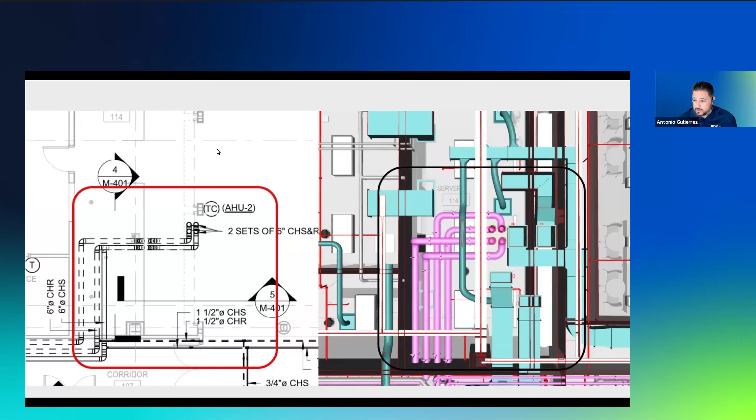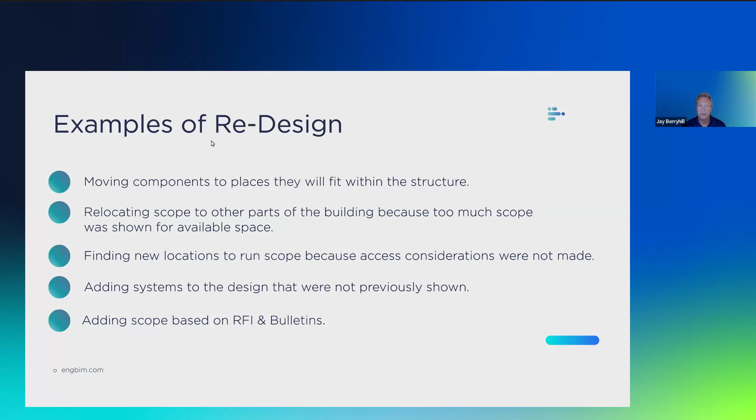Hey, Antonio, real quick, what tips can you give anyone in the trade on how to foresee some of these issues? One of the big things I do at the beginning of a project is I overlay a few of the trades, so I can pinpoint some trouble spots, narrow my focus, and then dig a little deeper. If you take that at the beginning of the project and just glance at a few things, overlay in a PDF viewer, it might help you focus.

Jay, yeah, jump back if you can, jump back some slides. Yeah, so let me come back. Sorry, guys. Kind of go through some stuff that we think doesn't really fall into coordination. That's really more redesign. Got it. Yeah. Okay.

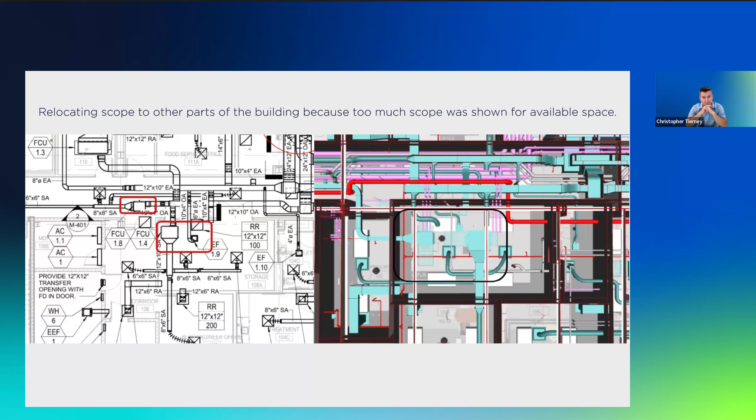And to try to point this out, this is a project that Antonio and I worked on together. I mean, these moves aren't by choice, they're by necessity. And I think that's a good point to make. You know, as a contractor, we move things out of choice sometimes to make it better for us or make it more reasonable. A lot of times you're forced into moving things out of necessity because where they're at doesn't work, or once you start to develop it, you find that it just can't be there. So this is a good example of something that moved out of necessity versus something that moved out of choice. Got it. All right.

Okay, this one, an FCU as well. This one's fairly big, so it was located in the far right corner in that smaller room. And as you can see, there's way too much congestion in that room for it to fit. So they had to drop the pipe to go below the steel. So again, total relocation. You know, look at the size, look at the access zones, things like that. It has to fit within the purpose of the structure.

And coordination versus redesign, it's also something to consider. I mean, we talk MEP, full circle, moving a component from mechanicals may impact electrical and plumbing and everybody else. It's not just the activity, what you're going to do to move or redesign your stuff. It's also the chain reaction that occurs when you start moving things, what it does for everybody else, which needs to be considered in that overall concept. Got it. Okay, next one for me.

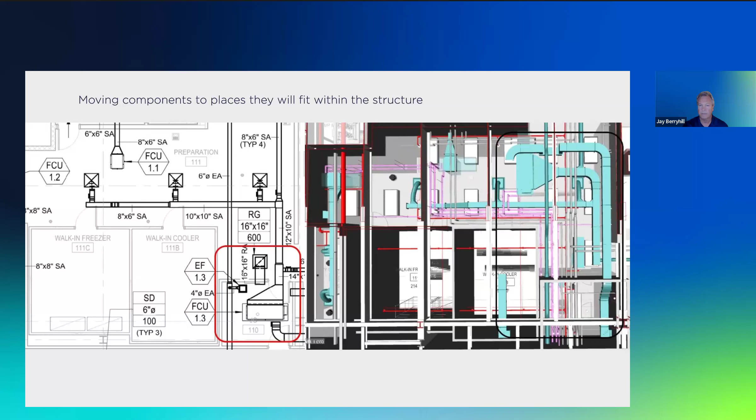Okay, another FC unit as well. It shifted out of the corridor. So if you look at the access zone, you wouldn't be able to access this unit in that corridor. So it had to totally shift again to the right because of the access. So new location.

And some of those things come into it. We go back to the contract documents and say, what do you own? And on a job like this, they'll tell you, you own constructible documents per the code. Well, codes may require electrical clearances, things like that, that aren't considered in the design. Now, is that a coordination item or is that a design item? And this is a good example of an electrical code issue that you couldn't have achieved based on where they showed the unit.

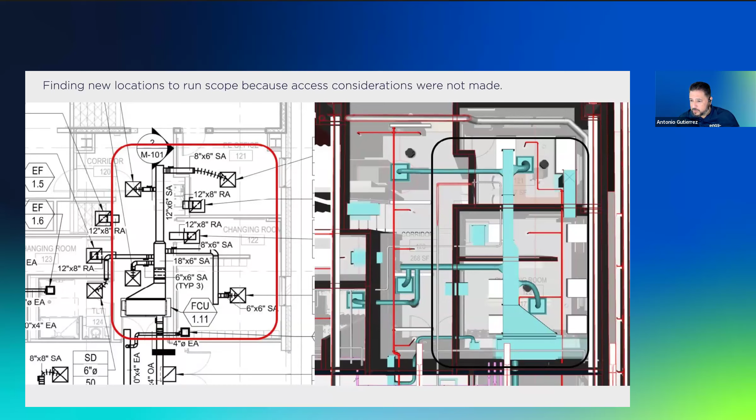Yeah, and because this one shifted, they had to up the size of the duct to catch those two taps on the left. So it's not just the movement of the unit, it changes more than that. So okay, next one for me, Jay. With this one, it's important that RFIs are accurate. So if you look at the left one, it's just the design RFI, and the right one's the accurate one. So next slide for me, Jay.

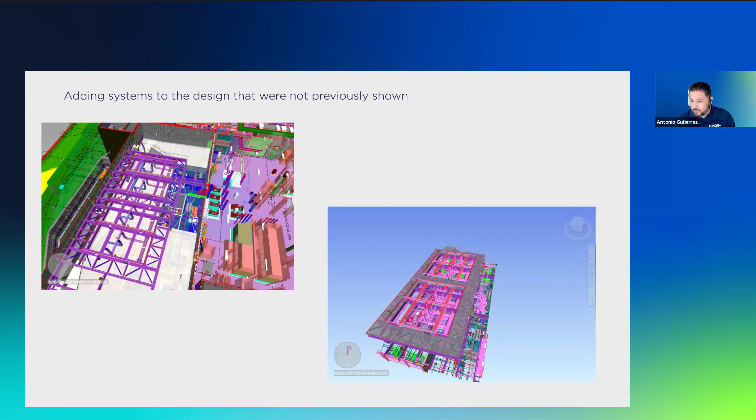If you look at this one, next slide. Okay, the left one is the design. So in the design, we only have supply, return, and the exchanger underneath with all that steel. If you look at the right, we had to add two other trades. We had to add drain and we had to add makeup water. So new trades, added scope. Again, it's going to add fittings. It's going to add penetrations. It's just going to add a bunch of stuff. Those are all things we need to look at.

Okay, next one for me, Jay. Again, this one, same thing. Accurate RFIs. We need to take the time to look at those things. This is your heat exchangers, different sizes, different depths, pad size changes, rotation, pumps moved, all because of the accurate RFIs. And with this, I'll pass back over to Chris.

Hey, Antonio, a quick question that came in. Some changes are just in coordination. Others require discussions, approval. How do you know which is which? For me, I set little rules for myself. If it shifts from one room to another in ductwork, that's a design change for me. But also when you're dealing with equipment, you're thinking of size, weight, pad size. If it's affecting any of that, we really need to look at that and say, hey, it's a discussion. If we have to talk about it more than once, obviously there's an issue. Yeah. So.

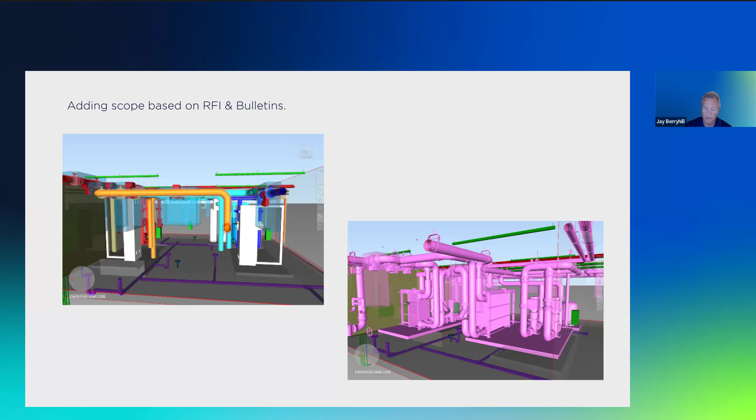So we identify there's obviously a question, problem, concern, something that comes up on a lot of different projects. So again, it's easy to identify the issue. So let's just talk about solutions. And the goal or the hope is to always minimize problems, minimize issues, minimize anything, because nobody wants to solve them after they're problems. So some of what we want to talk about is some concepts you can do to try to mitigate some of them or kind of head them off at the pass.

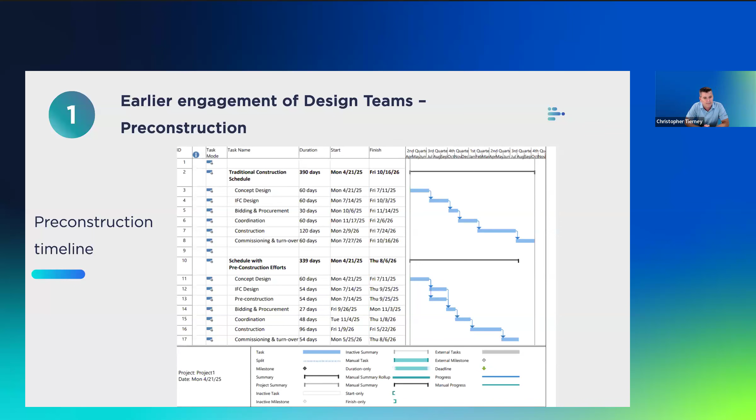Second concept. Utilizing real data and components. So we all know we bid jobs, we get jobs. We don't always know what we're going to use. We haven't gone through the purchasing process. We haven't gone through the submittal process. Maybe we haven't figured everything out. So we believe that the earlier you can incorporate real components into the design, the better off you'll be. Because again, not knowing what you're building to and putting a box in there isn't really going to make a lot of sense. And we go back to trying to avoid having to redo things, because that's redesign in my mind.

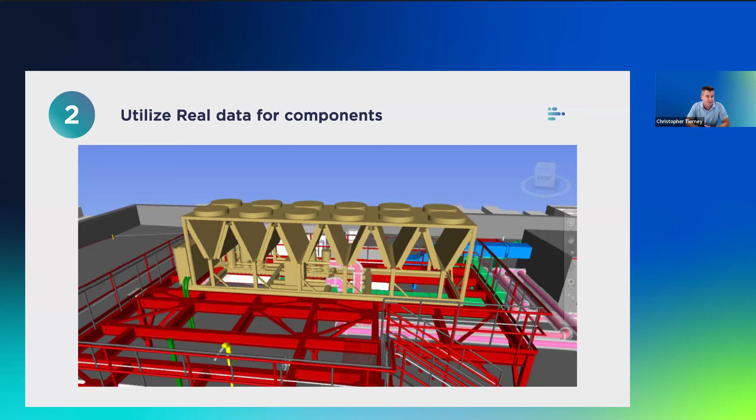Right. Next concept, Jay. All right, so determine design parameters and logistical issues in the initial design. So what do we mean by that? So understand what you're going to be governed by, understand what you're going to be held to. So code requirements for a project. What are the code requirements? ASME, ANSI, local jurisdiction code requirements, electrical codes. Understand the code version, what the specific requirements are in those codes. So know that going into the project so you can build that into the design.

Project specific specifications. We've all bid jobs. We all get these package specs that are 2,000 pages long and it's got everything under the sun. We really try to drive to project specific specifications. And with that, we really are talking about trying to get into specs that are really designed for that job and for that job only.

Jay's jumping ahead on me. He's going to check to see how well I know my slides. Sorry about that. So just, we'll see if you can roll back one more for me, Jay. I don't have them all memorized, but, well, hang on, let me see. Are we caught up? Have we caught up there?

Here we go. Okay. Safety considerations, a big item. We often talk about it too late in the process after coordination's been done. It's usually a function of the construction people telling you what they need for safety or the owner telling you what he needs for his long-term safety. So we want to think about those things early in the design process, make sure they're built in.

Owner requests for clearances or access. The owner's going to live with this building for however long they are. Their request should be considered whenever possible. Sometimes we think we have enough space to do something. The owner may need more space, may want more space, or he may have a long-term plan for the facility that we don't know about, fork trucks or equipment or whatever it ends up being. So you want to figure that stuff out in the initial design so that you don't have to worry about trying to add it in after the fact.

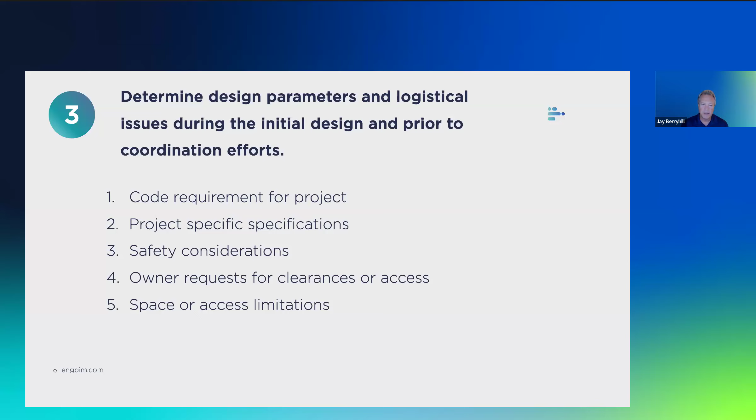And then lastly, space or access limitations. This is a big item that we often don't see in the initial design process that we want to get incorporated there, because more often than not, those things don't come up till the end or after the design's done, and they create a lot of havoc. And Jay's going to jump to the next slide. Chris, can you give an example of that? Yep. Next slide, I'll give you a good example. And it's a real life project we had.

So when we plugged them in, we found that basically everything we had done for these units wouldn't work. And we then had to go back into a redesign process based on access requirements that, had we known them early in the job, we might have either changed the equipment, changed the location, identified the concern to the engineer. And should he have known this stuff early in the equipment selection? Probably, but you want to pull that stuff out before you do the drafting, not after you do the drafting.

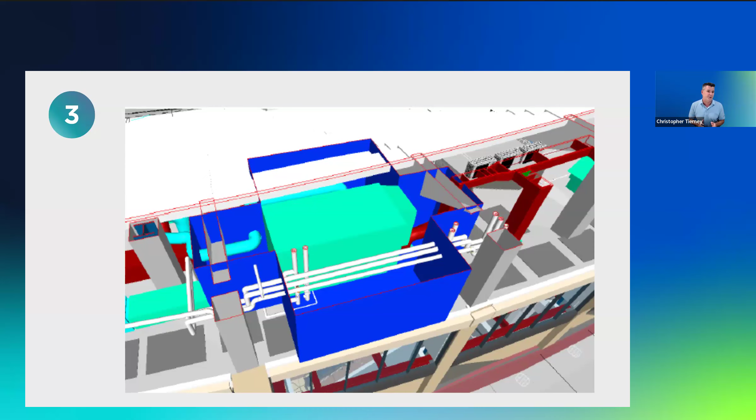Next concept. Engage installers for access requirements and constructability. So I'm a contractor. We have a lot of installers. Those installers have a lot of opinions and knowledge and insight that maybe somebody in an office doesn't always have. So we often try to bring them in or get them involved in some of this stuff.

So things that we talk about: clearance requirements for rigging and installation. If I can't physically get that component where it needs to go, it doesn't matter that it fits in this space. It doesn't matter that it's the right piece. If you can't get it in there, it doesn't solve a problem. You got to work that stuff out usually in the construction process and or move it. So that's a big item. Piece size limitations. We see this come up a lot. Again, renovations, existing facilities.

What can you physically get in the space? Know what those piece size limitations are and know that you've selected stuff that works, because again, sometimes you can choose an alternate manufacturer or an alternate piece that may be smaller, maybe breaks down. You want to know that stuff going into the design process, not try to figure it out after you're done, figure out how to make it work.

Egress paths, overhead clearance, another big item. You may not see that in the coordination effort, but you may find out in the construction process that it needs an egress path, it needs head clearances. Those are items that you often find late in the process that cause you to go back into the design. Again, going back into what we talk about as redesign as opposed to coordination. So we want to identify those things early, build them into the model, make sure they're there, make sure the design works around them and not necessarily tries to incorporate them after the fact.